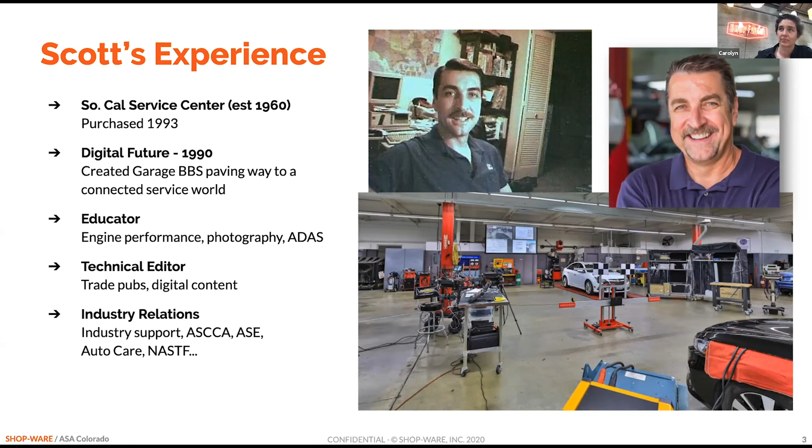Showcasing your shop's expertise. The reason why this session is called Showcasing Your Shop's Technical Expertise is because technical expertise is everything. When you think about why people patronize your business, they come in because you're fixing their car at an affordable price and you treat them with respect. Those three things. A lot of people ask me the question, hey, you've got this environmentally friendly business, it's woman-owned, it's pretty, those must be great competitive advantages. And I like to remind them that if we don't fix the car at an affordable price and treat the customer with respect, none of that other stuff matters. Not only that, fixing the car is the number one thing. So your technical expertise is the most essential component of this formula.

That's because if you can't fix the car, none of these other things matter. If you can, but the customer doesn't like the price, they can obviously go somewhere else, but they still have to find that other person to fix the car. And then obviously, if not the price, they don't like you, they still have to find someone to fix the car that they like more. So either way, you're at this, gotta fix the car component.

And what's remarkable about that is that's what we're selling. What we oftentimes forget is that this is our product. It's also the thing that presumably we know the most about. It's what we're most expert on. And finally, it's what the customers need, right? The car is what they depend upon.

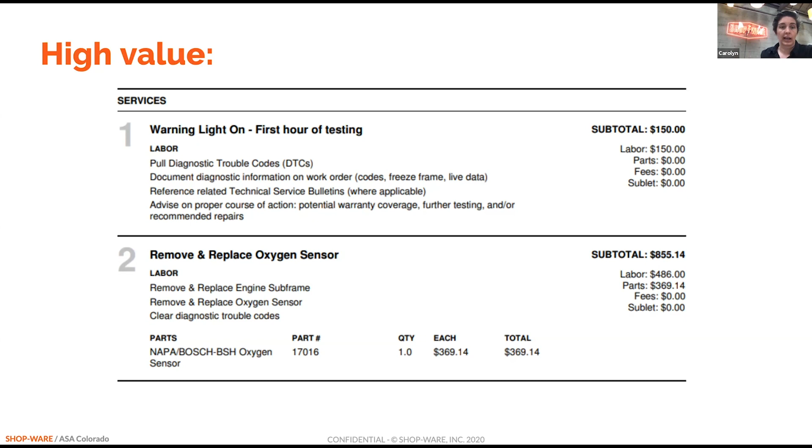Again, the $855 is being justified based on a warning light being on. So I got charged $855 for having a warning light on, versus I got charged $855 because I got my oxygen sensor replaced, right? They're not getting charged because the light's on. They're getting charged because you did something to the car. Over here on the right-hand side, you see the difference, right?

Not only do you see the extracted diagnosis from the repair, this is helping advisors remember, oh yeah, I'm supposed to be charging for diagnosis, and then justifying that charge to the customer with detail of what that diagnosis includes. And then it's clear to see what the customer is being charged for and what you actually did to the car.

We're going to go into some more real world examples here between Scott's and my shop. Scott, did you want to add anything else to this while I'm here?

Got to unmute. Yeah, I mean, this is great. I see the one on the left there, and we get a lot of cars that come in from other shops, and the car is still not fixed. And we always ask, hey, well, what's been done before? And we review these tickets, and it's all over the board. It's hard to tell what in the heck actually happened. So this is spot on.

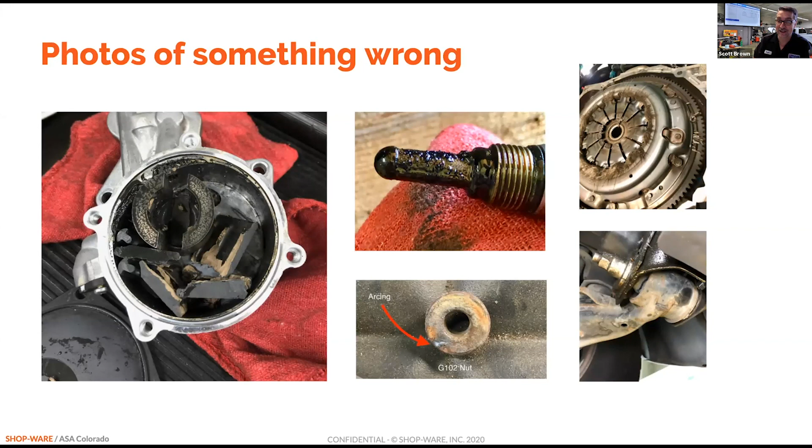Sometimes you've got very intermittent problems. That picture on the middle right is a ground nut - this car had been back a few times because we could never duplicate the complaint, but we were finally able to show the customer, hey, this is why we had to spend some money and time solving that particular problem. Customers don't get to see this kind of stuff, and we're documenting it.

Each one of these tools you're showing costs you money. Obviously the tests take time, but if you're pulling a tool out, even a special tool, take a picture of it and show it to the customer, because that's part of the suite of services you offer at your shop. Then the customer gets to see and appreciate, wow, look, you did an injector flow test.

I had no idea what that looked like. That looks really sophisticated.

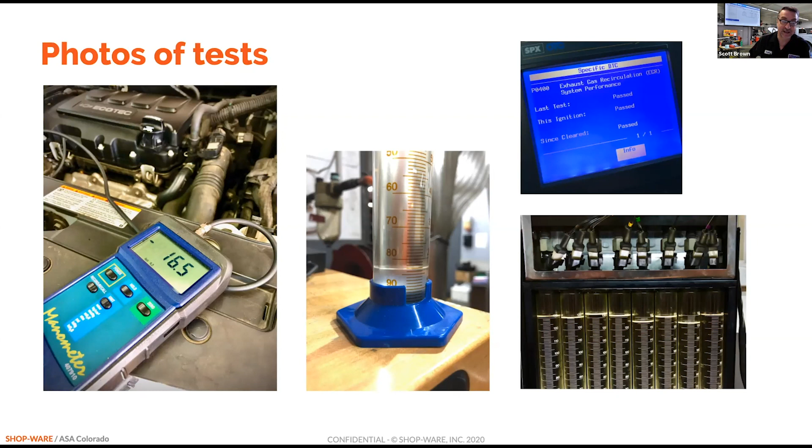We're always trying to differentiate ourselves. We're not the same shop down the road, and we want to reflect that at every opportunity. When a customer gets a ticket, you never know - these customers are usually talking to other people. If they have a bad experience, they're going to talk to more people to complain about it. But if they have a really good experience that's totally blowing them away, they're likely to come back. And if they end up at a shop that doesn't do this kind of comprehensive reporting, they'll expect it there too. If they don't get it, hopefully they'll come back to us and understand why they need to stay with us.

Yeah, more photos. There are so many small problems that pop up on cars that can cause strange anomalies, and we want to get to the bottom of the issue. Most of these are yours, I think, Carolyn, right? Yeah, this is from my list.

One thing I like to point out is that even if the maintenance service includes an air filter - meaning you've already sold it and you're just doing it - still take a photo. Take the original and the new one next to each other. Take the old spark plugs and put them next to the new spark plugs, take a picture of it. You've already done the work, they're already sitting there on the counter - take a photo of it and show it to the customer to demonstrate that value again. This is presumably when they're coming to pick up the car, so that when they pay for that maintenance service, they appreciate that something actually changed.

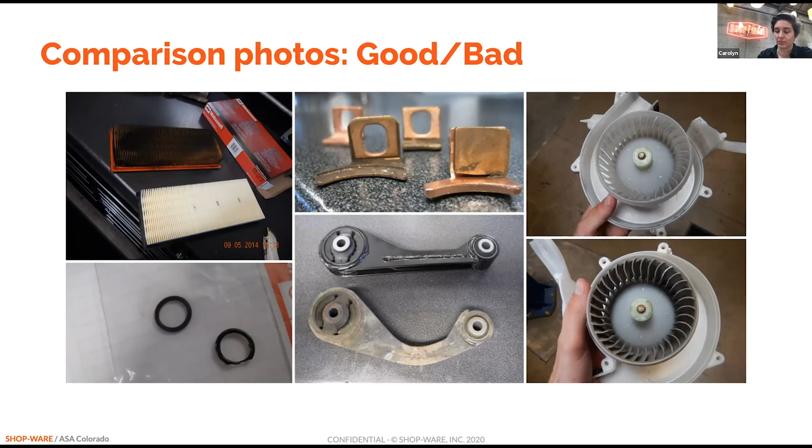So now we have a new policy where you take a picture of all the other struts on the car so the customer knows. In addition, I remember seeing service information where the OEM clearly defined the stages of failure and when they need to be done. My guys have access to all that service information - you quickly take a screenshot, give them that data, and it speaks volumes. It's not you telling them what needs to be done; you're letting the OEM, with factual data, demonstrate what's good and what's bad.

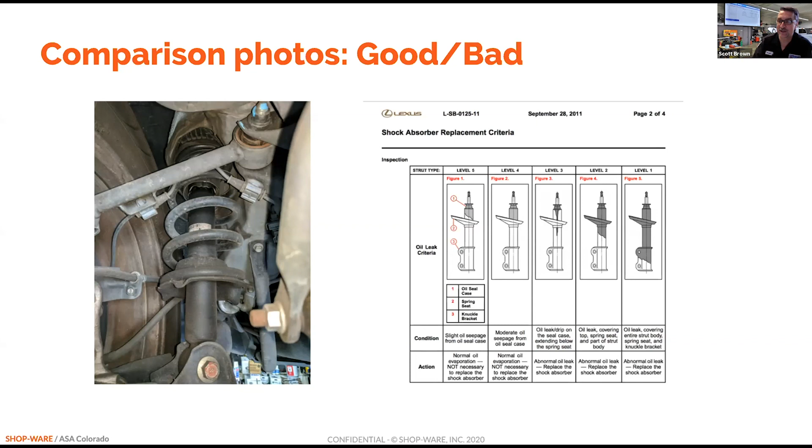Terrific, thanks Margo, I'm also watching the clock.

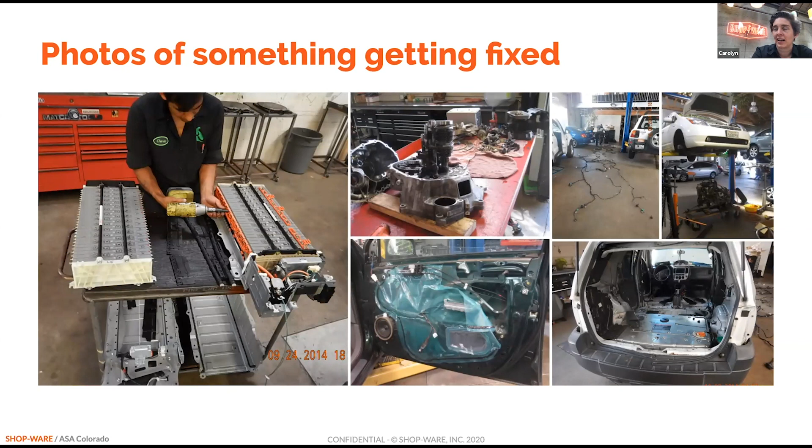We already talked about some of these things in the course of our conversation here. Here are some more examples to feed those who are looking for some inspiration.

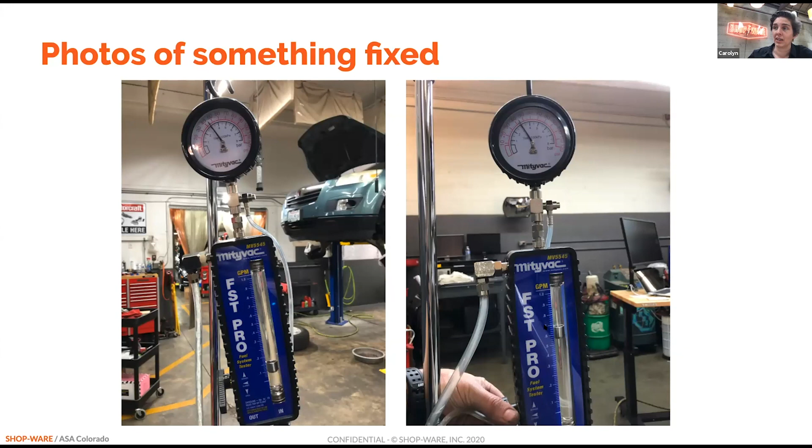This is another great story at a Scott's shop. In this case, you're seeing after the repair the fuel pump flow, and not only is the pressure the same in both cases, but you can actually see the difference in the fuel flow, which was the issue with this vehicle.

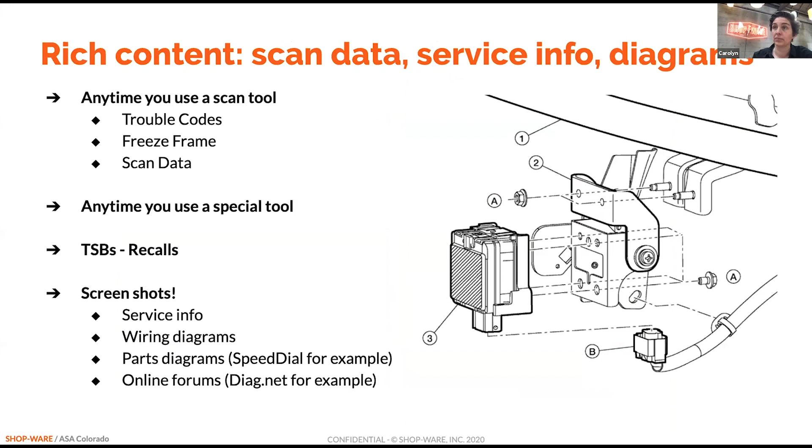Here are examples of screenshots. If you don't know how to take screenshots, follow up with us and we'll give you instructions on how to do that with whatever hardware you're using. For those familiar, this is a great way to get free content onto that RO, just like Scott was saying with that TSB. Take a screenshot, put it on the ticket.

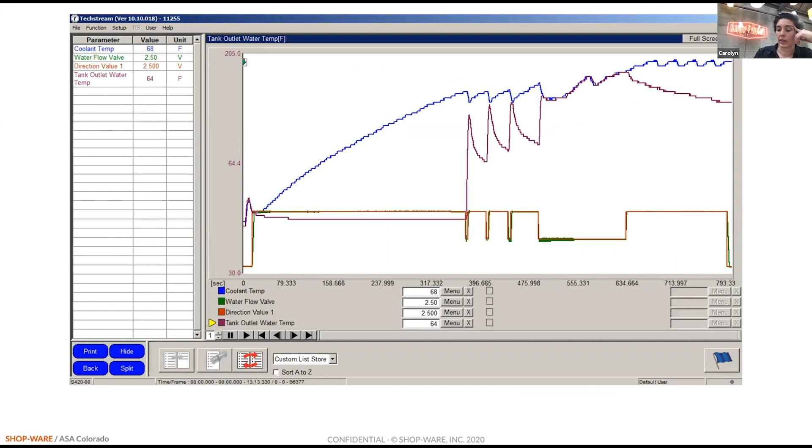Here are some examples of recordings that we make at Luscious Garage and present in front of the customer. I can go into more detail on some of these. These are extremely high value, and essentially we're taking these recordings while we're bleeding the vehicle, so it's not taking any additional time except to pull out the scan tool, plug it in, and record these 4 PIDs. It might add 5 extra minutes to the service.

We enforce that the technicians do this every single time, and we put this graph on the ticket every single time, not only to show the customer that everything was working and demonstrate our technical expertise, but also in case something happens. We've now proven that this entire system is operational before releasing the vehicle.

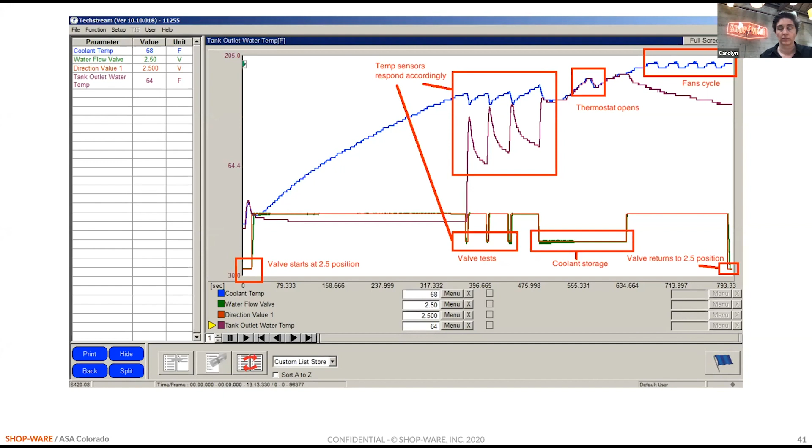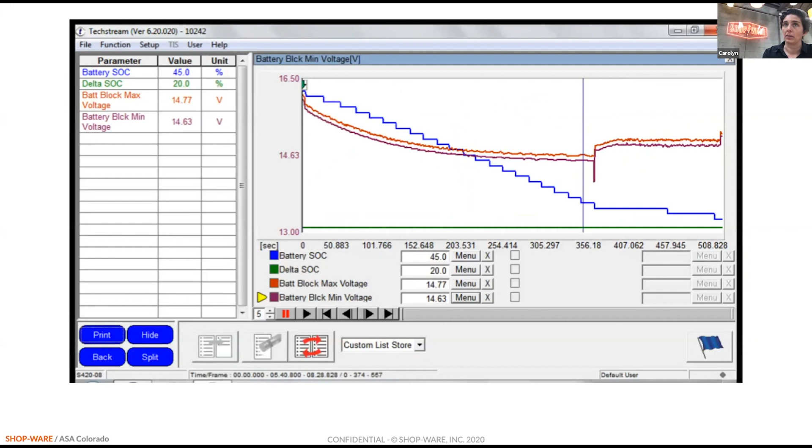Sure. With all the COVID stuff, we're in LA County, and this is before LA County had any of their recommendations or guidelines, but we decided to close our office off and move our check-in area outdoors, and Shop-Ware made it real easy for us to do it.

We just threw up—we had an Apple TV in the back room, and basically plugged that into the HDMI on that TV, and we wirelessly push up from any of the tablets or phones or computers to display the ticket to the consumer.

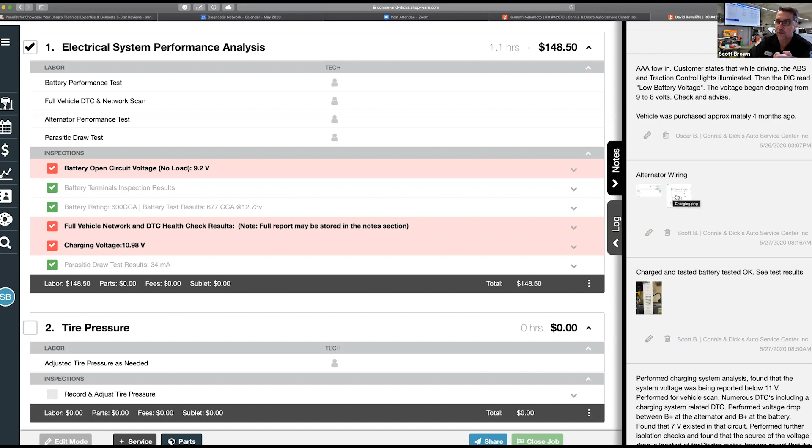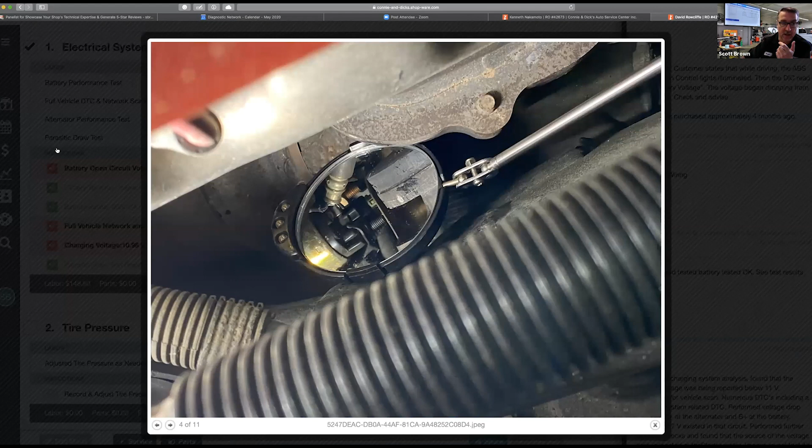One other thing I wanted to point out is that we also leverage the note area for things. When I'm working with other technicians, a lot of times we'll take the wiring diagram, or pieces of it that are highly contextual to what we need to deal with, and stick them right into the ticket. So they have a point of reference as we're testing, and we can just dump them right in there. Now we've got a way to document the data. Very, very powerful tool. I can't say enough about how this product helps us document the heck out of our work.

I saw a comment about what this looks like for the consumer. I'll tell you a quick story.

We recently had an episode where a car came in with a major problem after we serviced it. The guy went to the BAR and filed a complaint. So the BAR came to us and asked for documentation and paperwork. I sent him all the data, and a day later he called me back and said straight out, 'What shop management system is this? Because I've never seen anything so comprehensive.' I said, 'Well, we make a lot of comprehensive notes.' And he said, 'No, the way it basically tells the whole story, everything is there in place, and it illustrates what's going on.' I thought, well, I need to pass this on to the folks at Shop-Ware, because they'll want to hear this. But anyways, that's the end of my little story.

Why don't you go ahead and take it back?

Well, you had a story about this particular RO, where the customer asked you about the clutch thickness because you had the starter out. Oh yeah, let me go back and share that.

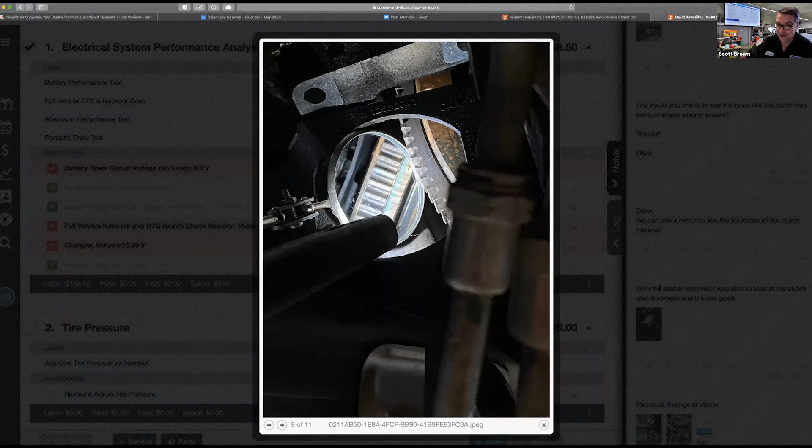This guy is actually a high school auto shop instructor at the high school I went to, in the next town over. This was the first time we saw this car, and we documented what we found. He was in the ticket, and you can see right here it says, 'Hey, could you check to see if the clutch has been replaced already?' So the customer posted a message in there. That was yesterday morning. Yeah, we can do that. We took a picture because we had the starter out, so we could take a mirror in there and look at the clutch thickness, and it looks pretty good. Then the customer came back into the ticket, taking a deeper look, and said, 'Holy Moses, what's your plan for repair? I know you have that webinar tomorrow, see you there.' So this is how modern day communications can take place, this is really, really cool.

And this was not staged, it was just, I saw this morning. I'm going, holy crap, this is pretty cool. I've got to show this to Carolyn.

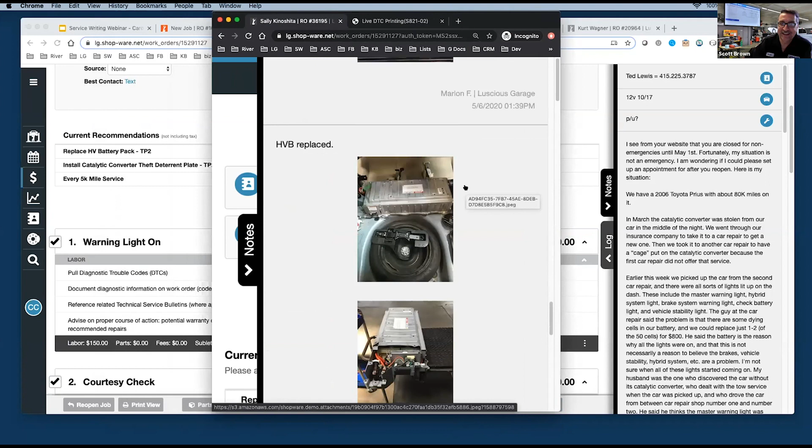Yeah, so you're trying to demo a mobile device, which is tough, but the consumer can easily pinch and zoom and all that good stuff.

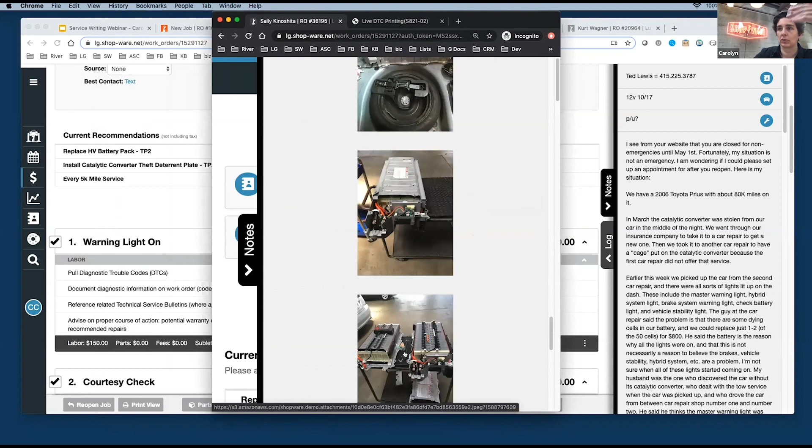So this is the photos of the hybrid battery being replaced, so they can see what this thing is. Some details from the maintenance service, and then the customer said, great, we'll pick it up tomorrow morning. Fabulous. So they got a chance to see this whole thing and remote pay before they came and got the car.

So this is what the customer sees. Do you want to show a print version of that as well?

Let's do it. And also real quick, while we're on that topic, we have someone asking if all the notes are visible to the customer.

You can keep these notes unpublished if you wish to have them not show to the customer. You also have the ability to put notes into what's called repair order notes so that they're only back of house, not front of house. Some folks prefer to do that and then decide what they want to publish directly under the RO. So there's different ways of controlling the notes feed and what shows to the customer.

This has got some larger photos on it, so it's taking a minute to download, and as soon as it's loaded, I'll open it. For those familiar with Shop-Ware already, it can take a long time for the PDF to get created, and we have an optimization the developers are currently working on that will be delivered probably next week.

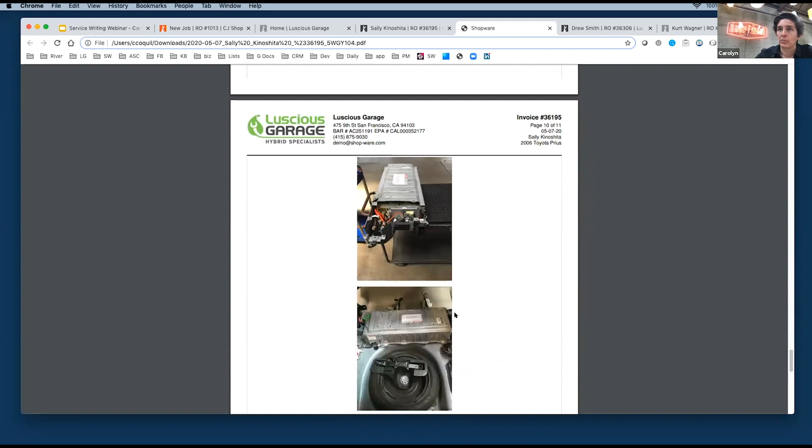This is an 11-page invoice. The point is, it doesn't matter because they're going to get a digital copy - you don't necessarily have to print it. If you did want to print it, you can choose how many of these pages you want to print. But there's no penalty for being more long-winded because they're going to get a digital copy. You shouldn't feel penalized for adding more value to that ticket. Now, this was an 11-page RO, but it was also, whatever, $3,300 - excuse me, so we're happy to provide as much detail to justify that expense.

Any other questions? Yeah, there was a suggestion, and I'd like to hear what you have to say about it. One of our customers says that he's actually using a canned job as the initial concerns, keeping them all in one place by using that as a service item. What are your thoughts? Yeah, you can put your customer states wherever you want to put it.

So if you find that the checklist format is nice, we have that as what we call special requests. For example, I can type in requests here, and it's going to bring up the special requests, and then essentially you can just start itemizing what the customer's requests are. Then obviously the technician has to go and check them off so things don't get missed. We like this for special stuff, not every single time, but for folks that want to use this at the top of every RO to gather everything, this is a great way to do it.